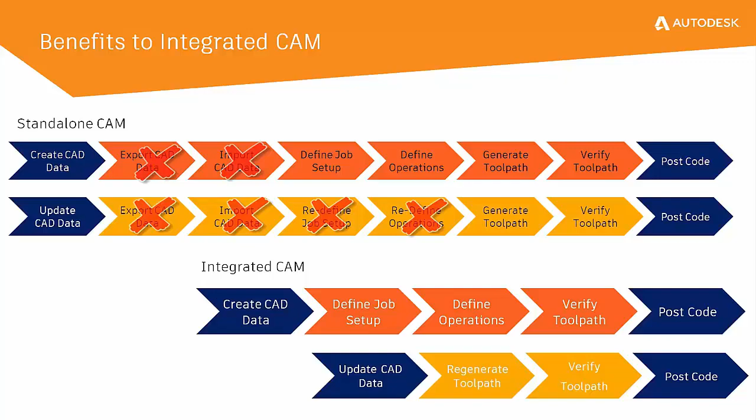So what's happened there is that, a couple of quick bullets on summary there. We've streamlined the workflow. Also, because you're not dealing with multiple softwares or file types, you end up with less files, less file types, and a simplified data structure.

Because you're working in one platform, the only extra training that you would really need is how to use the CAM tab and how to import your own machines and tool libraries. You don't have to retrain on a completely new interface or anything like that, from different developers, different icon sets, blah, blah, blah.

The natural benefit of having an all-inclusive CAD-CAM platform as well means that you have a full set of CAD manipulation functions, surface modeling, parametrics, built in, all the modeling tools that are built prior to milling. So you can fill holes in pockets, you can create or update runoffs, you can add fixtures.

Don't get me wrong, little caveat, there are products out there that do have a basic CAD modeling environment built in, but most people will agree on the call, it's far from comprehensive. Sometimes it's only surface modeling tools, it's not parametric. And again, it's a different file format. If you're a machinist, you'd have to get the design office to make tweaks to tooling fixtures and so on if they didn't know how to do it.

And the last point there brings us on to AnyCAD. Inventor includes the AnyCAD technology, which they bought into about 5 years ago. And it gives users the ability to direct edit files from other CAD programs. And this is important. You don't necessarily have to import or convert the data in.

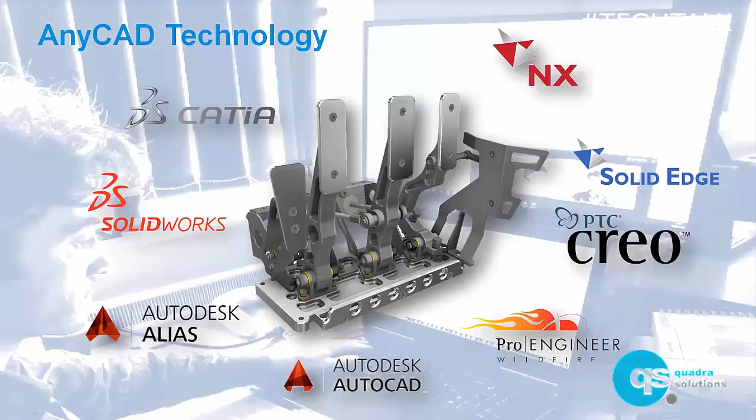Steve Hall can show you that drop-down list when he goes file open, of all those that it can take in. Some of the mainstream CAD packages will allow you to import files from other developers. The benefit of AnyCAD, though, is not that it can import the file, okay? It's that you can simply link to it and maintain an association with the other guy's part file.

So if you've got a Creo colleague in a different office or a supplier that uses Solid Edge, for example, and that guy changes their Solid Edge file, you can save over the top, hit refresh, and the associated model updates within Inventor. So you don't have to re-export and import.

Then, linking to the CAM, I appreciate I'm talking about AnyCAD here, but this is important with Inventor CAM. In the CAM tab, the toolpath and the strategy associated to that newly refreshed part that you've just re-linked from an updated Solid Edge or SolidWorks part can then be updated, as I explained earlier. Just hit refresh and it'll regenerate the toolpaths.

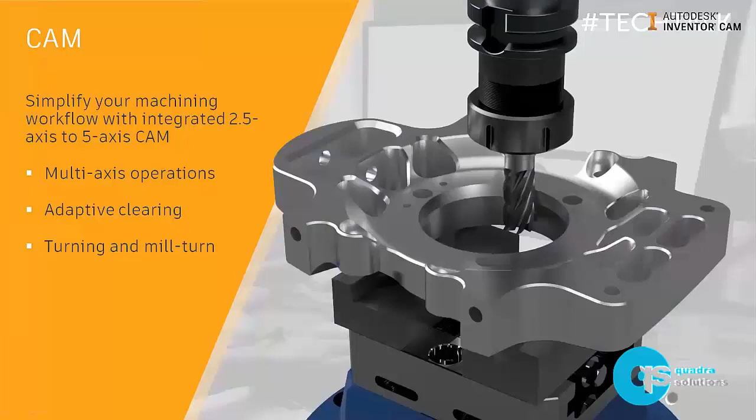Good afternoon, everyone. Right, so I'm just going to quickly go through a few bullet points about the various strategies that come with Inventor CAM, and then we'll jump straight into the software itself and have a bit of a show and tell.

So as you can see from the current slide, we can go from an integrated 2.5 axis up to 5 axis CAM, multi-axis operations, adaptive clearing. We'll be covering 2D adaptive and 3D adaptive, and we'll also take a look at turning and possibly mill turn as well. If you could jump to the next slide, please, Mike.

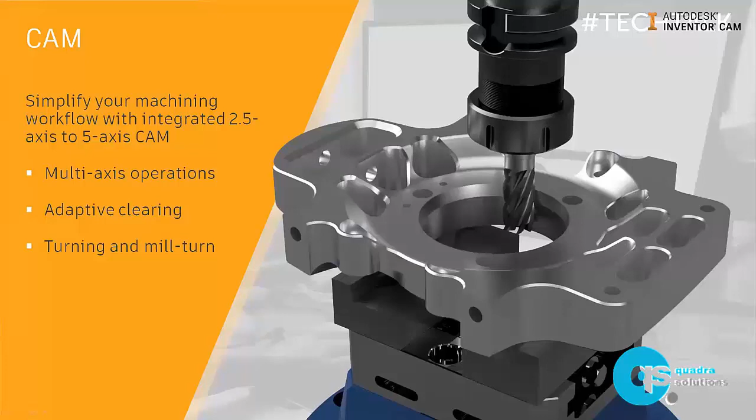Thank you. So I'm just going to briefly touch on these bullet points. As you can see from the capabilities list there, it's quite extensive. 2.5 axis, 3 axis, 3 plus 2 axis, which is where the table will cradle or rotate and then lock in situ, so it can be machined in one hit, as opposed to having to remove it from the vise or the fixture. 4th axis milling is where we would set a chuck, for example, or a 4th axis separate entity itself onto the machine.

Multi-axis milling is where we talk about simultaneous 5-axis machining. And then we're also looking at turning. There's also capabilities for cutting, as in laser cutting, for example, and also for using a probe for setting datums on multiple parts using a probe. So as you can see, it's quite extensive.

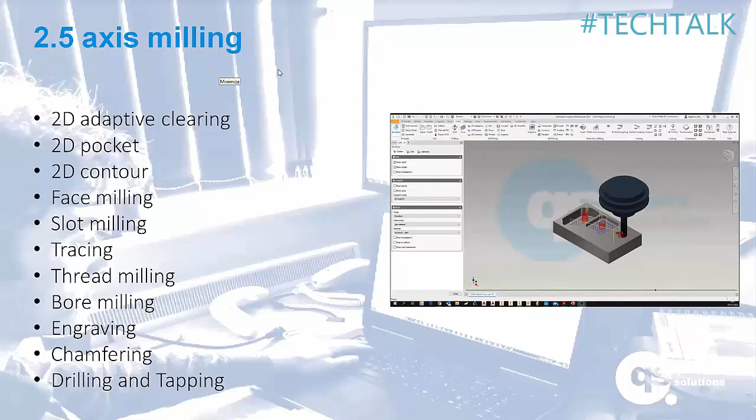Okay, so 2.5 axis milling. If you're not 100% sure what that means, essentially anything that can be machined using 2-axis moves comes under 2.5 axis milling. What we mean by that is, as you can see from the list, you've got 2D adaptive clearing, pocket, contour, and so on and so forth.

What that means is that the machine will position itself in the X and Y coordinate. It will then feed down in the Z coordinate, and it will then move in a series of X and Y coordinates to produce contours and pockets and faces, so on and so forth. This can also entail bore milling, thread milling, drilling and tapping, and so on and so forth.

It depends on the surface that you are machining, the gradients of angles and so on and so forth, upon which strategy you would choose. But yeah, that falls under 3-axis milling.

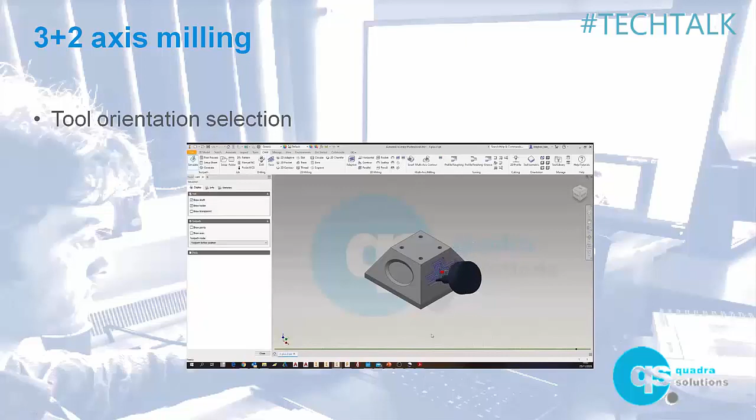3 plus 2-axis milling, short and sweet. This is where you can set your tool orientation so that if your machine has got 3 plus 2 axis milling capabilities, you can rotate and cradle your actual machine and then lock it in situ. So you can then produce pockets and holes and slots and so on and so forth on side faces, be they on an angle or at 90 degrees. I'm seeing it quite a lot now, these machines out there in industry locking themselves in position and then attacking it from all different angles.

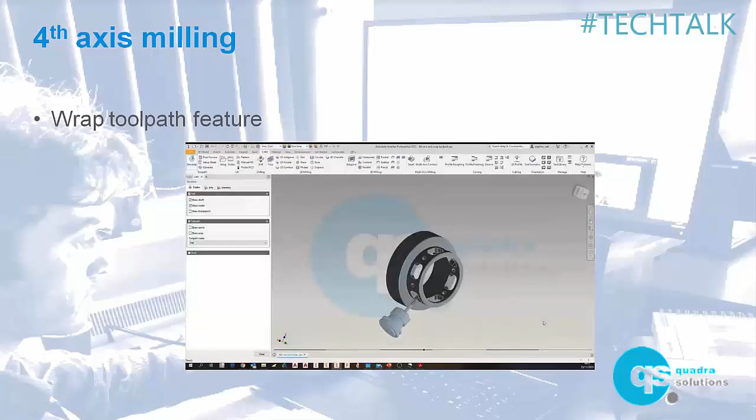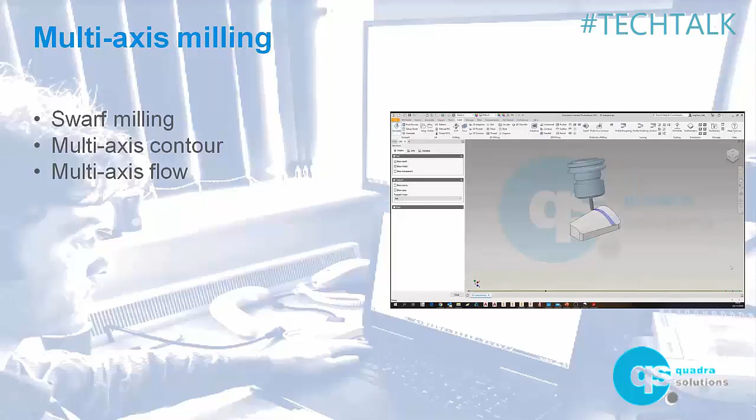Multi-axis milling. This is where we're going to be using simultaneous 5-axis strategies, such as swarf milling, multi-axis contour and flow. The video there is showing the flow control, and that is where a ball nose cutter is following the path of the contour. And as you can see, it will be cutting at the side or the edge of the cutter. It's entirely up to you. You can set whatever angle you want, and the table will cradle and rotate as it's being machined.

Turning. For those of you that are running lathes at your industry, you'll be pleased to see that turning isn't forgotten. For a while, it was quite limited. The profile roughing, as you can see there, didn't exist. You had to use a grooving tool to rough everything out, which wasn't ideal.

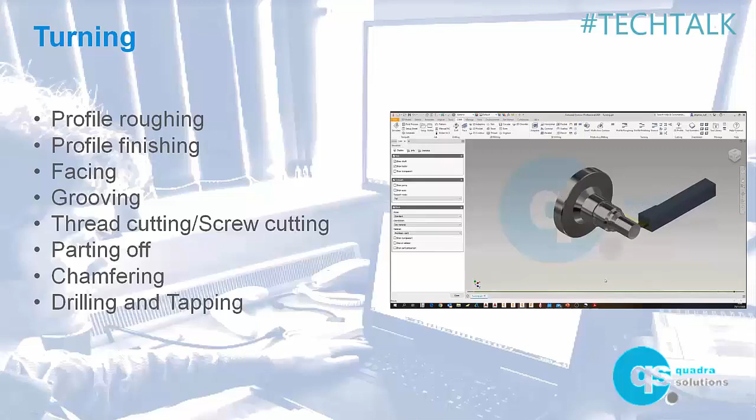But Autodesk listened to the feedback from customers, and last year they introduced profile roughing, which, as you can see, is an extremely good strategy, very efficient in that you can rough out entire components in literally just a couple of clicks. It's very impressive. So it's a good display of Autodesk actually listening to the customers there and enhancing the product when they see fit.

Okay, so what we've got here is a component, relatively simple. If you look at it in that view, you can see it's kind of like what we call a dog bone type shape. Got a couple of bores in, and it's got some chamfer details on there. If I just quickly drop over into the 3D model and the model environment that you're all no doubt familiar with, you can see that there's an extra tab just about halfway across there for CAM.

If I open up the CAM tab, and if I go into my browser and activate that CAM browser there, you'll see that I've got now the option to create my setups and my toolpaths and so on and so forth. The beauty of this is that the panels, the way they are laid out, are very similar to what you're already used to.

So if you're an existing Inventor user, when you're working in 3D model, for example, you can see that the panels, the drop down, so on and so forth, are very similar when we actually activate the CAM tab. So it's familiarity, it's not a whole new screen that you've got to memorize and visualize and learn. It's pretty much as it is with the 3D modeling side of things.

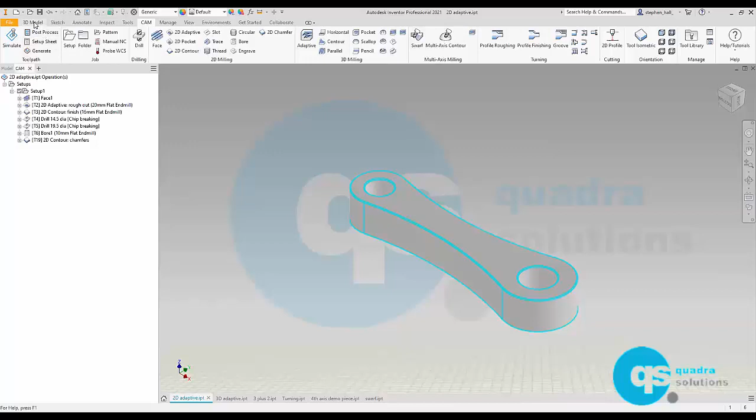Obviously, there's a few strategies and features and buttons that you need to learn how to use. But again, if you're already an existing Inventor user, you'll find this very easy to cross over and transfer into. Okay. First and foremost, I'm just going to quickly show you the tool library settings. So what I've done is I've preset everything, working my way along. I'm going to explain about each different strategy.

It's kind of like a Blue Peter. Here's one I prepared earlier.

But if I open up the tool library, this is quite an important aspect of Inventor CAM. You'll see that for this particular program, I've got numerous tools that have already been preset. What we've got down here are lots and lots of sample libraries. So for example, different types of holders, different types of cutters depending upon the material that you're machining, different types of cutters with respect to the shape and sizes and so on and so forth.

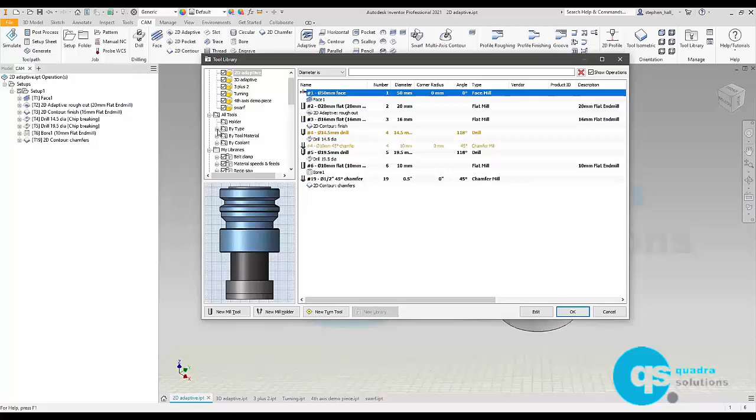For example, if I expand this little column here for different tools of type, you'll see that we've got flat mills, ball mills, tapered, face mills, slot drills. Okay, these are all generic. If I specify a drill, I can then, up in the top, go through a search process and say I want to find a 10mm drill. It will find me a bank of 10mm drills.

If I select one of those, I can right-click. I could actually edit that tool. So if that's not exactly what I've got in my workshop, if I've got one that's shorter or longer, if I open up the edit panel, you'll see now that we've got a few options. We can change the lengths of the shoulders and the flute lengths, the body lengths, so on and so forth. We can change the units from millimeters to inches if that's what we'd like to do.

In the general tab, we've got the tool number, any length offsets. We can have a break control. So if your milling machine has a presetter in there which inspects the tool before and after any tool changes, you can activate that. If you don't have a tool changer, you can activate a manual tool change. Coolant strategies, just about every single option you've got there, flood, mist, so on and so forth. So there's a lot to choose from.

You can even choose the material of the cutter, high-speed steel, carbide, so on and so forth. You can specify what holder it's held in. You can create new holder geometry if you've got your own bespoke one. And most importantly, feeds and speeds. You can set the feeds and speeds.

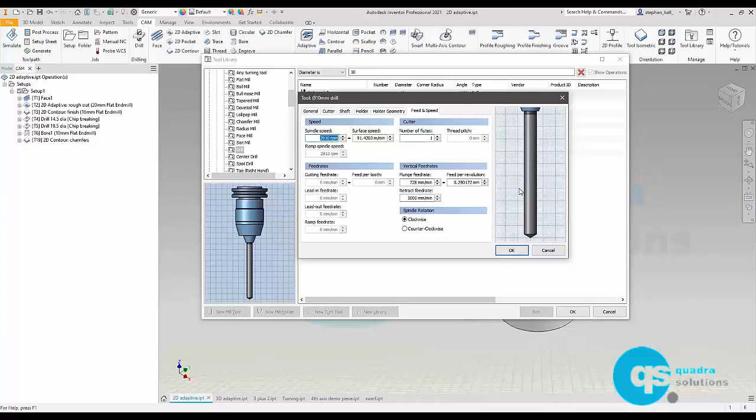If you've got a certain drill and you've got a recommended speed and feed that comes from the manufacturer, or if the guys on the machines tell you that it runs better at such a speed and feed, you can override these yourselves. You can then create your own custom library in that respect. Okay, just going to cancel that for now.

So first and foremost, we've got the component. First of all, we need to tell the software what setup we're going to use. And by setup, what I mean is I'm going to go up to this panel and select this icon here. So if I just double click there, the one I've done earlier, as you can see, it will immediately put some form of block around the component, what it second guesses the stock is going to be.

Okay. This tab is the first tab that always comes along, be it in turning, be it in milling, be it in cutting, so on and so forth. Okay. You can nominate the machine. You can nominate the operation type.

So for example, milling. You can set the orientation. Okay. By orientation, what I mean by that is I could select the Z-axis and the X-axis. So if that had been drawn by a designer who decided that actually he was going to draw it with Y pointing upwards, because there's no guarantee that the guy who designed the part would automatically have Z sitting as you would like it in the machine.

You can just select the Z-axis and planes like so. So if I select Z-axis there, I can then set what I want to be the Z-axis. Okay, I can click on the top face. I could click on a line on the component. It doesn't really matter. That is now set. The same goes for X-axis.

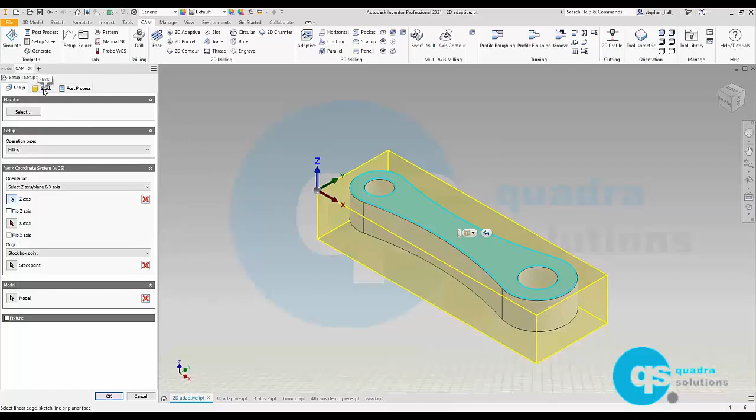The next tab along is our stock tab. And again, you've got a few options. It will give us a second guess as to what it thinks is beneficial, but we've got a little drop down there. You can have a fixed size box. You can have a relative size box. By relative size box, we mean that maybe we want to add a millimeter all around, but there's no guarantee that the material we'll get off the shelf would fit that. So we use fixed size box, and we just put some coordinates in there, which best suits the material that we've got on the shelf.

If I do a side view, you can see that we've got material there on the bottom, and what we've got there is the height of the stock itself is 30 millimeters, and what we've said is position the model offset from the top. It will default to center like so. And you see you've got an equal amount of material at the top and the bottom.

Okay, we need as much material as we can at the bottom because we're going to grip that in a vise. So if I set it model position wise offset from the top, and then an offset of 1 millimeter is fine. You can see that I've got a millimeter of material to be machined off the top. I've got a nice healthy lump there to get a hold of using my vise.

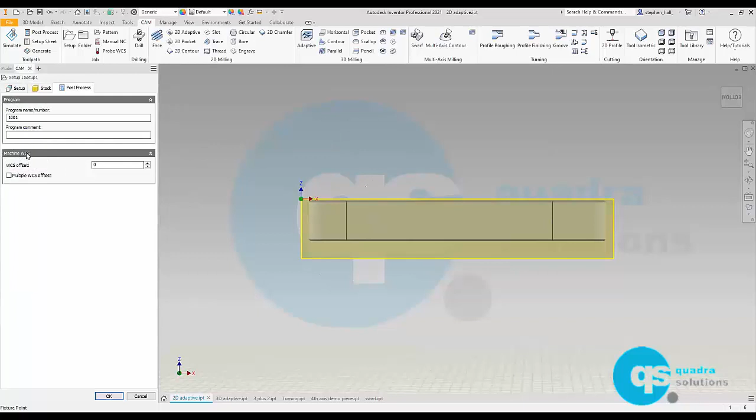The next tab is the post-process tab. Essentially, you're just giving it a program name or a number. You can put some comments in there for the start of the program. And then you've also got machine WCS, which is your machine workpiece coordinate system. If you use FANUC, for example, then you'll understand that G54 is the datum of your machine. Okay, that's X, Y, and Z positions. Setting to 0 or 1 will automatically use G54.

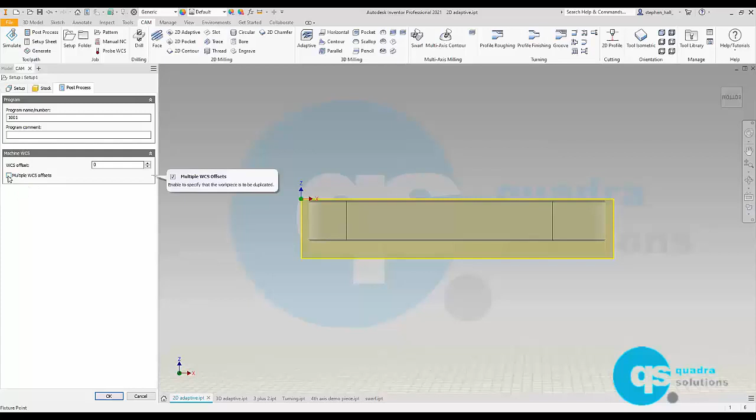If you have multiple components on your machine table, so let's say you've got 3 components on there, then all you do is you tick the multiple offsets box, and you can give it some number of instances. So for example, we've got 3 there. We've now got 3 components. We'll increase each increment by 1, so it'd be G54, G55, G56, and so on. And then what you could do is you could then output the program to suit 3 components as opposed to 1.

Okay. Operation order, you can preserve the order so it will machine one of them before jumping to the next, or you can have it ordered by tool, for example, whereas you could use a face mill to do all 3 components before tool changing for the next tool. Okay, so I'm just going to deselect and cancel that because I've already got one set up.

Right, let's go back to the home tab. Okay, first option there, as you can see, we've got a face operation. That falls under this category, 2D milling. We've got 2D milling, we've got 3D milling. 2D milling is contour driven, 3D milling is surface driven. As you can see by this, 2D milling is perfect for this component because we've got a lot of contours with no surfaces, with no fancy shapes that we need to produce on there. So if I go up to this icon face, this would open up this panel.

And first and foremost, it's selected the 50mm face. I just click tool. I can do a search through my existing library, or I can preset a series of tools within this component. Select 50mm face, and that's it.

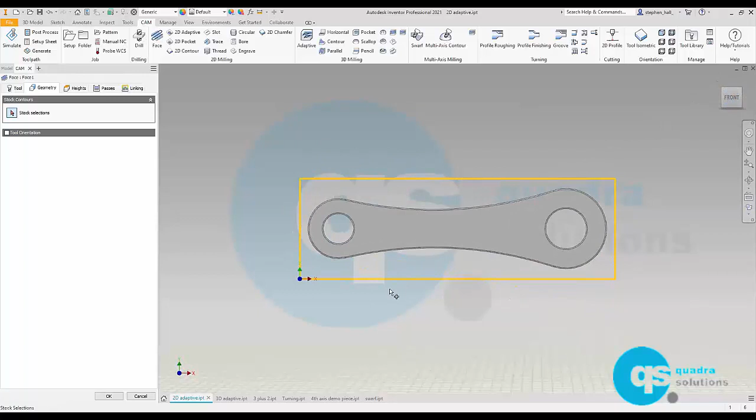So I've picked a tool. The tool is defaulted to flood for that tool, which I'm happy with. The default speeds and feeds I'm happy with. So I'm going to move to the next tab, which is geometry. It will look at my stock. So I want to face mill all the way along the top of this component. So looking down from above, you can see that the stock is encompassed by that yellow line. So I don't need to make any changes to that.

If I move to the heights tab, you'll see that if I look on the side view, you've got color coordinated heights. You've got clearance height, retract, feed, top and bottom. Okay. Again, every feature that you use has got those colors, color coordination there. And then I'm going to leave that exactly as is. I'm going to make no changes to that. For passes, I'm going to make no changes again. And the same goes for linking. I'm just going to click OK. So all I've done basically is select one tool.

Okay, you can see now the toolpath has been highlighted on the component. You can see there the red arrow. If you see the yellow line, that's rapid. If you see green, that's what's called linking. So it's a lead in, it's linking in. Blue is where it's feeding across. As you can see, it feeds across. It then leads around there and comes off and up.

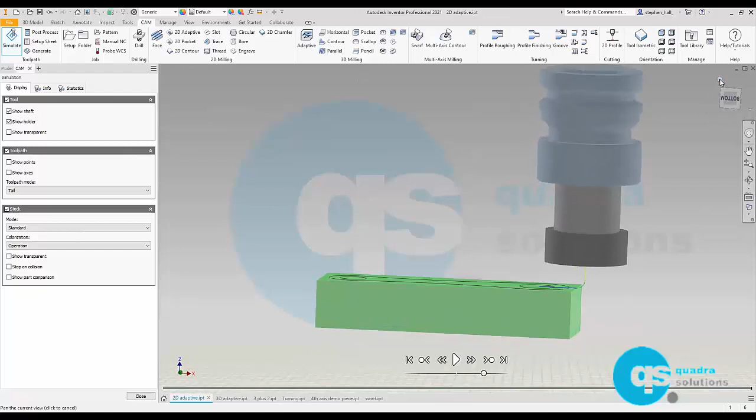If I give a quick demonstration running simulate, and I'll discuss the simulation environment later. As you can see, if I press play, it's pretty much done what I wanted it to do. Now, if I look at that from a side view, you can see that all of the cutter hasn't come off there.

Okay. Now, the reason being is that the software expects the machine that you're using to be perfectly brand new and not have been on the shop floor for the past 25 years and had numerous bumps and bangs, and your tooling and whatever to be perfect. That's not always the case. If need be, and you need to sort it so that it comes off the table.

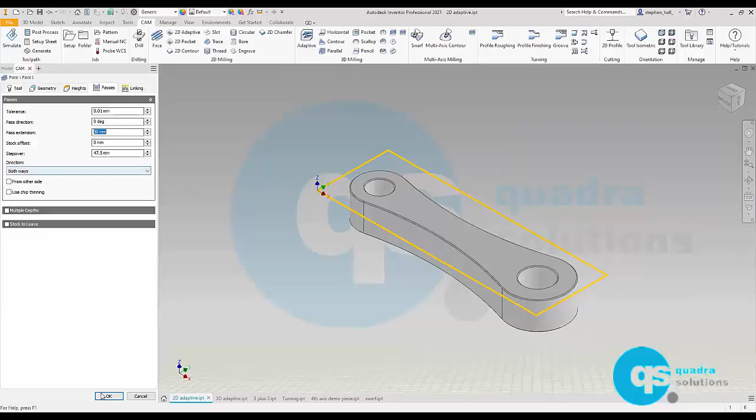If I just right click and edit to go back into that feature, if I open up the passes tab there, you can see we've got an option for pass extension. If I just put a figure in there such as 30 millimeters and press enter, if I now give an example, can you see now it comes all the way off in both respects. Okay, so it doesn't produce anything called a back cut. So you probably get a better surface finish on your older types of machines.

And that's it, face milling, very minimal. About one change made, but everything else straight out of the box. We're now going to move on to 2D adaptive. And again, this falls under the 2D milling environment.

And if I quickly give a demo of that, what we've done this time is geometry. We've selected those outer edges. And all I've done is I've clicked on those edges for pocket selections. So I've told it that that geometry is what I want to rough out. 2D adaptive will do the rest for me.

Heights, I've not changed anything apart from made sure that the model bottom has been selected there and the stock top. Passes, I'm going to leave it exactly as it is out the box. And you can see you've got an optimal load on your machine and your cutter there of 8 millimeters. And we've got some stock to leave. I've changed it so the radial stock to leave will leave 0.5 millimeters around all these faces. And then axial stock to leave, I don't want to leave any on the bottom.

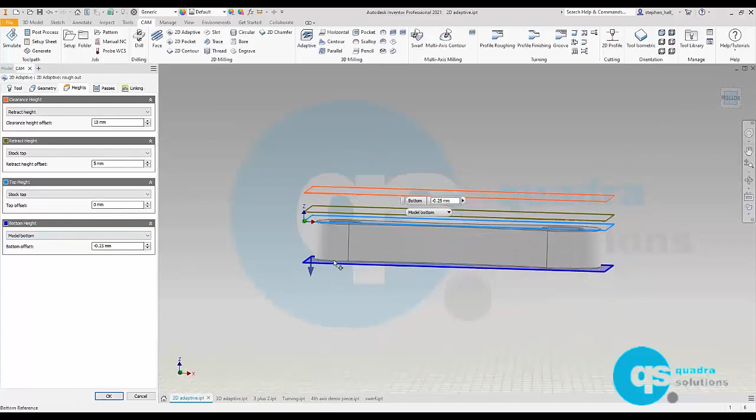And you'll see also in the heights that at the model bottom, I've just told it to go 1/4 millimeter down. So if I just quickly zoom in on that there, you can see it's just slightly lower there so that we just cut a little bit deeper than we'd like. If I just click OK for this one, and again, I will give a quick simulation of that.

The beauty of the 2D adaptive is that it will try and maintain the same amount of cutter load on the machine at all times. There won't be any abrupt or nasty changes where it will dig into the component and the cutter will start screaming and vibrating. It'll do its utmost every time to maintain that same load on the cutter. There's no nasty surprises. Okay.

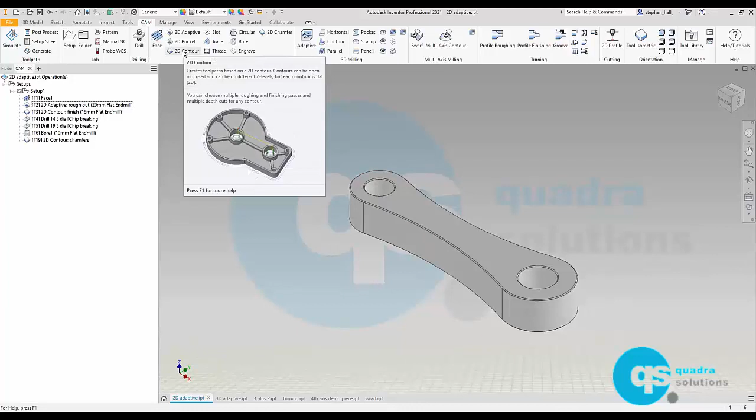2D adaptive roughing strategy. What we want to do now is we want to create a finishing strategy that machines around this profile. Okay. And we're going to use something called 2D contour. But rather than start the contouring operation from scratch, if I go into 2D adaptive and I right click on there, about halfway down I've got an option there, create a derived operation. If I say I want to use 2D contour derived from that 2D adaptive operation, it will then create a 2D contour operation and the same tool will be selected.

If you wish to change the tool, then you can just go back into tool and change it as such. But the geometry has already been selected because it's derived from the roughing operation. We've already got that selected. The heights are all the same. We can make some changes if need be, so on and so forth. So we've got very minimal changes. And as you can see there from that one, actually machining around the component as a finishing pass.

Okay, drilling operation, very simplistic. We've got 2 holes there. We're not sure what size they are. Let's quickly go up to the inspect environment. Let's just measure that one. You can see we've got a 15mm hole there, and we've got a 20mm hole there. Nice and straightforward. We just go drill operation in the drilling environment, and slightly different, not as many tabs for this one. We pick the drill that we wish to use.

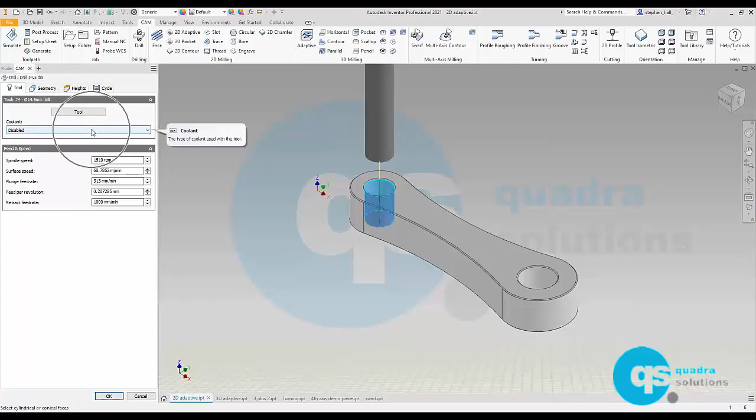We decide what type of coolant we want. We've got it disabled for this one. Geometry, this is a good feature. You select the hole. If you have multiple holes that are the same diameter, you don't have to go through the arduous process of selecting each individual hole the same size. You've got a little button there for select same diameter. Okay? Heights. It will err on the side of caution.

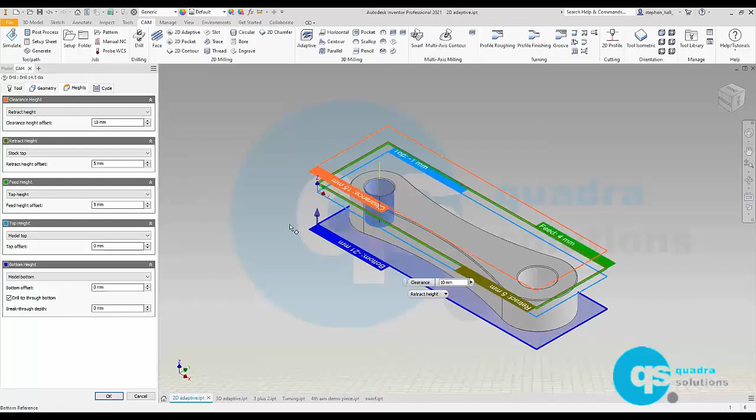And if I spin it around and look at it from there, you'll see that the hole feature is there. The drill will not bottom out unless you tell it to. You may want that to be a blind hole. If that isn't the case, you just select that button there to put the drill tip through the bottom. And as you can see now, we've gone through the bottom of the component.

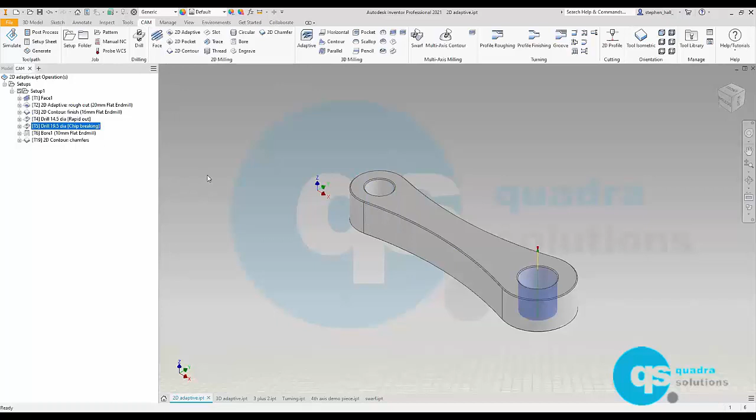And then lastly, drill cycle. What type of cycle do we want? Lots to choose from there. Do we want chip breaking? Do we want deep drilling? Do we just want to go through in one hit? If we do, we just click OK. And you can see there, the drill operation. We've got the other process there exactly the same. We could right click on that one and we could duplicate and then just change by selecting the new hole as opposed to the old one.

Nearly at the end now, we've got a boring operation. This is a good feature. This will use something like a slot drill or an end mill. And if I just demonstrate for those of you that aren't aware what a boring operation is, if I just turn the stock off, what a boring operation will do is it will feed itself down into a hole and then spiral around in increments of 1mm, which this one is defaulted at, just to bore out the hole to give us a superior finish and better size.

And again, it's using both the holes. As you can see, that is just one operation for both holes. All we did for that one is in geometry, we just selected both of the hole features. What Inventor will do, it will recognize they are both different sizes and it will adjust itself accordingly to create each hole there.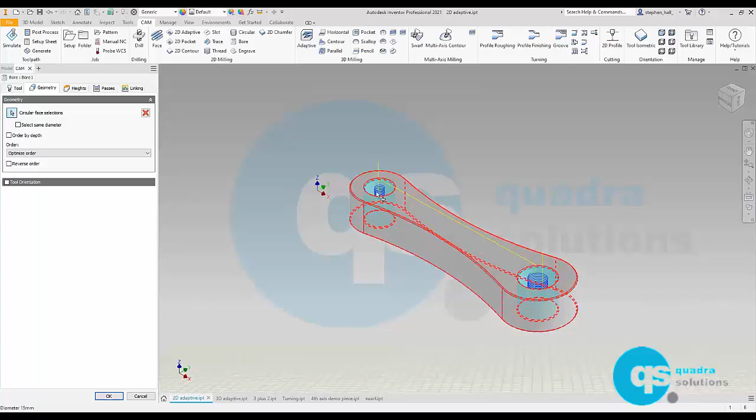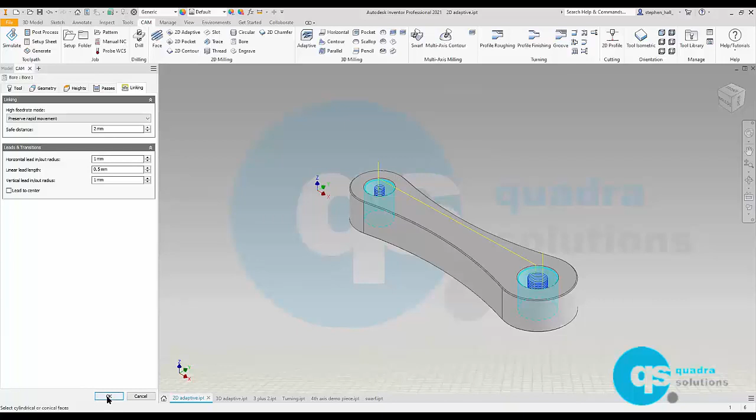Passes is where you change the pitch. 1mm increments is what it defaults at. You can change that to as fine or as rough as you wish. If it's a finishing operation, you probably want to reduce that, but obviously it's a little bit more time consuming. The linking tab, lead in, lead out, you can make some changes. Again, I find that working straight out the box and just clicking OK gives you the best option. If you're not happy with it, you can then go back and tweak it yourself.

Now finally, 2D contour. We've got there some chamfers. If I double click 2D contour, but this time for geometry, as you can see when I zoom in, I've selected the bottom of the chamfers there. As soon as I do that, if I go into my tool and I select a chamfer tool, the strategy will recognize that I'm creating a chamfer based on the fact of my tool selection.

So that when I go into passes, you can see now a new box would appear. This isn't normally in our 2D contour, but as soon as you select a 45-degree cutter or a chamfer tool, it recognizes and it will adjust itself accordingly so that you can make some changes. Maybe you want a tip offset so it just drops down a little bit further, and we'll put around there like so.

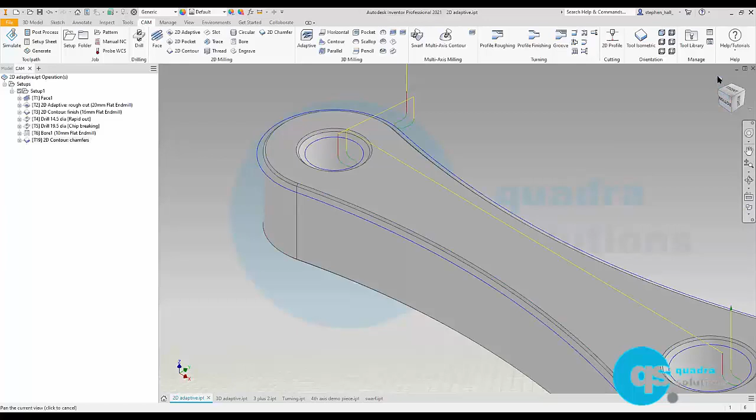Okay, so I do appreciate that I've rattled through that one, but we have got quite a bit to cover. So we've gone from a basic setup, the face milling operation, 2D adaptive, 2D contour, 2 drilling operations, a boring operation, and a 2D contour. So now let's open up the simulation environment. Let's have a quick look at that.

Okay, let's just rewind back to the beginning. So what you've got is just like a standard video player. You've got a play bar, you've got fast forward. You can jump forward through each feature strategy. And you can rewind back to the beginning. Okay. You've got an option there to show your tool. If you don't want the tool on display, you can turn it off. Same goes for shafts and holders.

Toolpath, you can have it show the entire toolpath or just a tail. I prefer tail because you'll end up with spaghetti all over your component. You'll see the toolpaths here, there and everywhere. What the tail will do is it will follow the cutter for a short while and then it will remove itself. And then finally, you've got the option for stock.

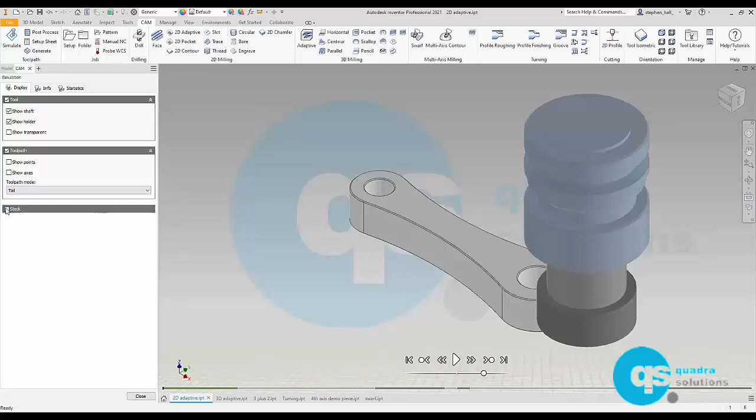Okay, the coloration, I prefer to use operation because it will differentiate between each operation. It will change the color. If you use material, then it will stay and maintain the same color. So you can't really see much of what's going on. So I prefer personally to use operation. If I press play now, you'll see it in its entirety. The model still exists underneath the stock. If you want to turn the model off, you can do.

But as you can see now, we've got a roughing strategy there for the 2D adaptive. Once that's finished, it will then jump straight to the 2D contour operation, where we have a finishing cutter there. We're now drilling the holes, boring out, and then we're going to chamfer.

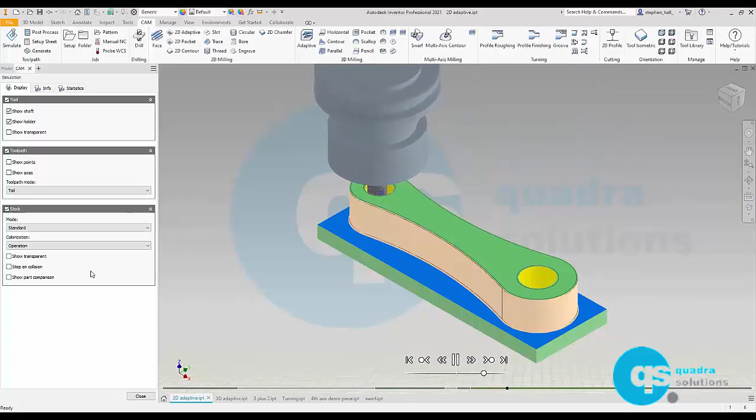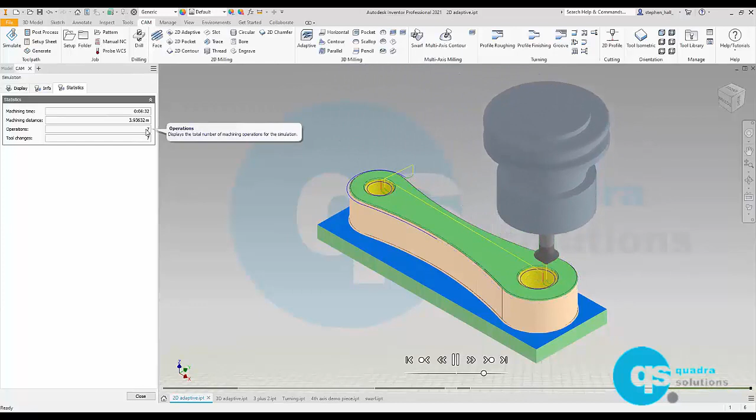You'll also see on this panel, you've got an information tab, giving you all the positions, be they X, Y, and Z, spindle speed, and so on. It'll also give you a time for each operation. And then you've also got a statistics panel there, giving you the total machining time, number of tool changes, and so on. As you can see now, we've chamfered out there. Happy days. Okay, so we've looked at that, we've verified it, we're happy.

Okay, what we can now do is we can post-process. I can right click on there and select post-process, or I can go to the post-process panel up there. Either way, once we post-process, this panel appears. Now, Inventor has got a lot of different post-processors, as you can see from this extensive list. Okay, I've defaulted to Siemens Sinumerik, 840D. Okay, and you've got an output folder. Be that a folder on your machine, or maybe a USB drive, or maybe something on your network.

You can give it your program name or number. You can put a comment in there if you wish to do so. You've also got a few modifications you can make to the post. These are editable modifications or properties that you can define for your post.

So for example, some machines don't like the preload tool operation, whereas it will call up a tool, for example, tool 1, and then the next line will say T2, where it gets the magazine ready. Some machines don't like that. If yours doesn't like that, quickly tick that box there, click no, and then we're good to go. Everything else, we're going to leave it as is.

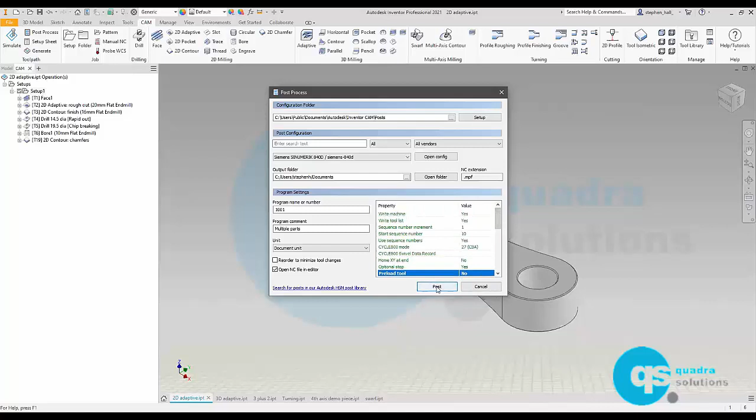I'm just going to click post, save it there. It's going to tell me I've got one there because I've always used the same program number. And as you can see now, we have the full program there. As you can see, it's got the program number. It's an MPF file because that's the Sinumerik one. Tools 1 to 6 and then 19 with the tapered. You can redefine your tool names if you need to do so.

And as you can see, each individual operation is now highlighted there. T1, D1, M6 to change tool, spindle start M3, and as we said before about the workpiece coordinate, there's your G54. That's setting your datum. And then we've got all the X and Y coordinates.

What I do like about this is every rapid move is highlighted red, so you can quickly scan through everything. And if there's anything in there that you don't like and it's in red, you know that you can change it. Anything in green is where it feeds down, and then blue is where it will reduce contours. That's basically it. Straightforward and simple.

I'm going to quickly show you 3D adaptive now. So what we talked about here with 2D adaptive, we did the 2D adaptive roughing strategy. You can now move over to something called 3D adaptive. The difference between the two is 2D adaptive is contour driven, whereas 3D adaptive is surface driven.

So if I expand and open up this part, if I rotate that, you can see we've got a component there where the form is out of the ordinary. It's not a standard 2.5 axis part. Using a 3-axis machine, that can easily be achieved. If I open up the 3D adaptive control panel, you'll see now those tabs are identical to the 2D adaptive one, the geometry one, and so on and so forth. Like I said earlier, it always stays the same.

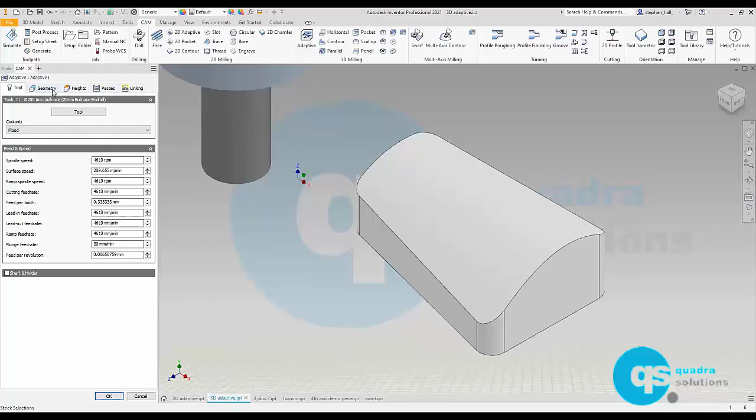We've got a cutter there we selected. Geometry, we're just going to use stock geometry again, so basically everything inside there is fair game. We'll machine it away. Heights, exactly the same as earlier. If I look at it from the side view, we've got some clearance heights, we've got the bottom height, the top height, so on and so forth.

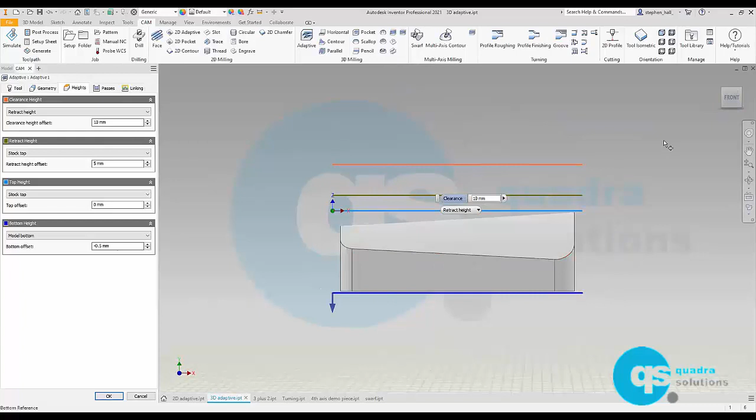And then for passes, we're going to leave everything as is. We can set a maximum roughing step down. If we want it to go deeper, we can do. Stock to leave again, but everything else we're just going to leave. I'm going to click OK. And then if I quickly let this generate, you can see the toolpath there is a bit more extensive.

If I just right click and simulate this toolpath, you can see that it will do its utmost to maintain the same amount of load on the cutter as much as it can at all times. Again, no aggressive moves, no sharp moves into corners and full diameter cuts where the machine starts screaming. And I'll just speed that up a little bit, I'm conscious of time.

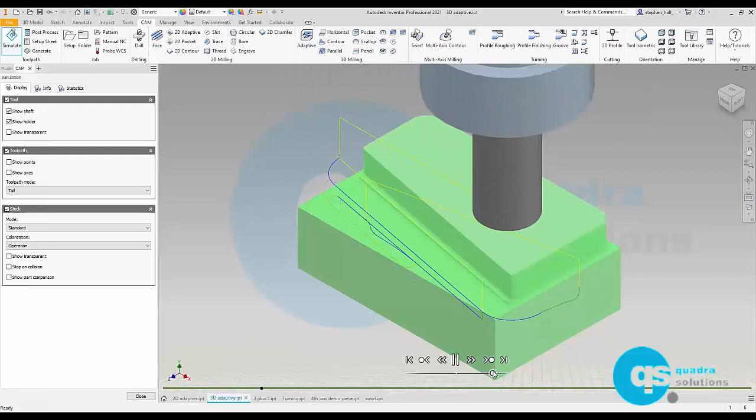You can see that it's gone to the bottom, it's roughed out its initial step, and now it's working its way back up, taking smaller cuts to produce said form. So again, very minimal clicks, complex part roughed out in no time whatsoever. Very, very simple. If I close that one, we're going to have a look at some 3D strategies now.

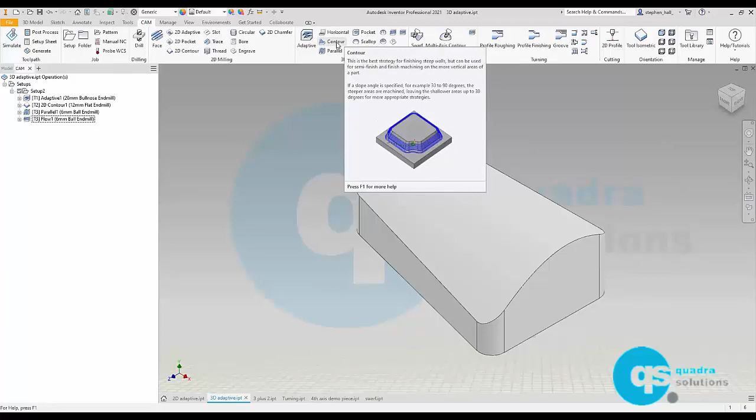I've got another operation there where I've used 2D contour, where I've just cleaned up the edges, just like the last program where I machined around. What we're going to look at now is the parallel and flow. 3D milling has a lot of strategies depending upon the gradient. So for example, you've got 3D contour. What I really do like are these little tool tips. If you hover over one for long enough, it will tell you what each individual strategy does. So for example, contour is for steep walls.

Okay, and parallel is probably one of the oldest. It's been around for years, but it's very, very useful. If I quickly give you an explanation, what we're going to use is a ball nose cutter, so something with a decent radius on. Okay. The geometry, same again. We're just going to keep it as the silhouette, so we're not going to make any changes.

Tool center on boundary, which means that it can pass over the edges. If you have it within the boundary, then you'd have some little scallop marks there. But again, it defaults to tool center on boundary anyway. Heights, we're going to leave as is. Passes, the only thing we change is the stepover. I think it defaults to something like 10%. So I've just reduced the stepover to 0.5 millimeter for this one. And then I'm just going to click OK.

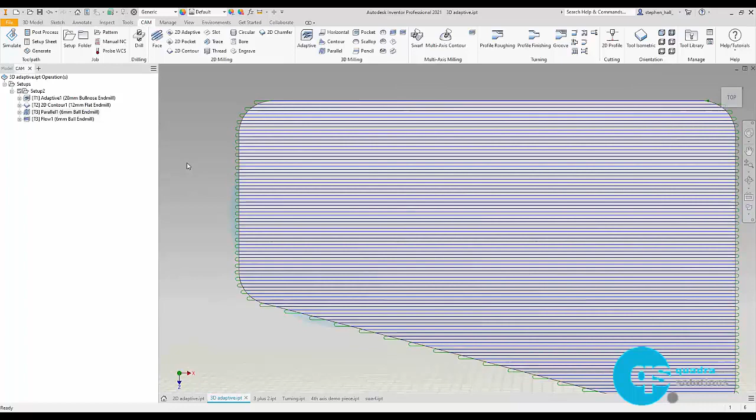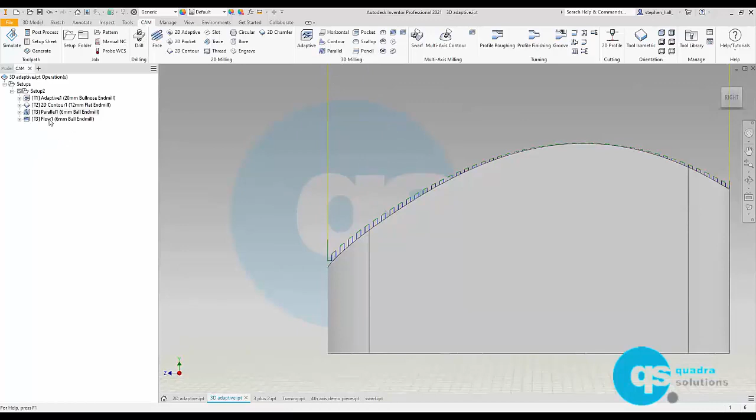And as you can see, looking from above, you can see why it's called parallel. Got lots and lots of nice, neat parallel lines there. If I go back to home and show you from this view, what you'll also see is, the more aggressive the drop, the 0.5 mil increments will stay the same. Therefore, we could end up with some scallops. That's why sometimes it's best to blend two strategies together, or use the relatively new one called flow. But for now, let's just leave that one as is.

If I quickly simulate that one, I'll turn the stock off and you can see what's going on. There you go. If I go from that view there, you can see that we're moving in X, Y, and Z to create that form on top of there. So again, a minimal amount of button clicks gives us a very good form on top of there.

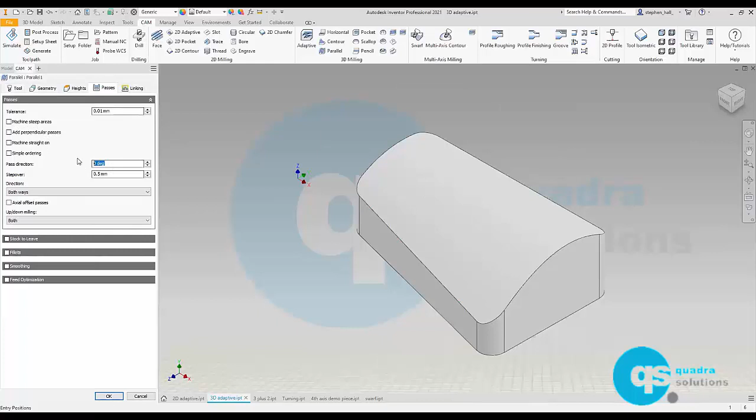What you can also do is, if you're not happy with the direction it's going in, maybe for your surface finish you want it to be a different gradient, for example. If I go on to edit, go on to passes, I can change the pass direction. So I could go on 90 degrees, for example. And then OK, and that will generate a toolpath, which you can see now goes off in a different direction.

Now, one of the new kids on the block is called flow. Again, that falls under 3D milling. It's a 3D milling and also a multi-axis milling strategy. And flow is essentially very similar to parallel. For the geometry, you just click the face and you choose a direction, be it in X or in Y. Passes, you don't nominate sizes, you actually give it a number of stepovers.

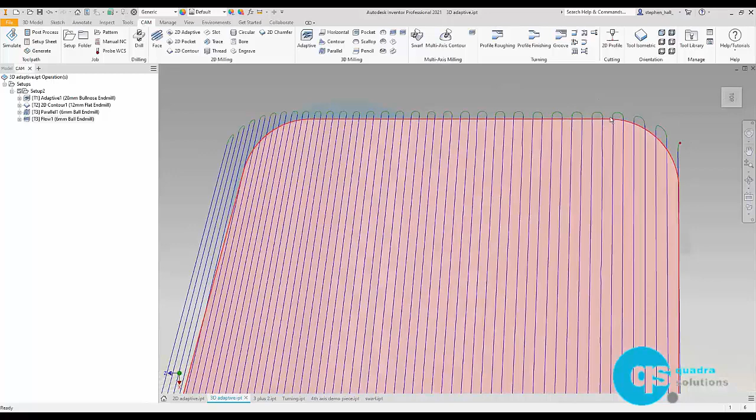And by doing that, if I look at it from above, can you see at the top we've got some relatively short gaps, and some slightly bigger ones. If you look at the actual cutter path, we've got straight parallel lines down there, but along here it fans out, so it follows the contours of the component. So that might be preferable depending upon your surface finish. Again, you could go to the nth degree, put 100 in there, and get a very good finish on top of that component.

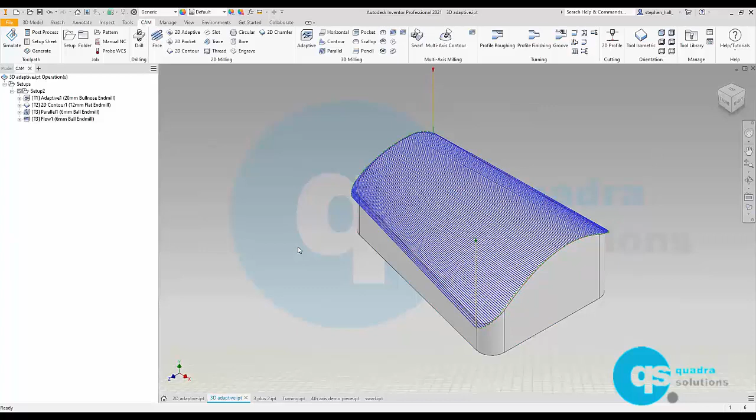Again, very simplistic. I'm just going to change this one back so that you're not sat around watching it all day. What I'm going to do is change to multi-axis. So rather than a 3-axis machine, let's assume that we jumped onto a 5-axis machine. We can activate multi-axis, and let's say we want to put a tilt on there, because they always say you should never machine right on the bottom of a ball nose cutter. You should try and machine on the edges to get a better finish.

So if I put a 15 degree sideways tilt in there, and then, let's see what happens with that one, and simulate it. If I look at it from the edge now, you can see it's using the full simultaneous 5-axis capabilities of the machine, like so.

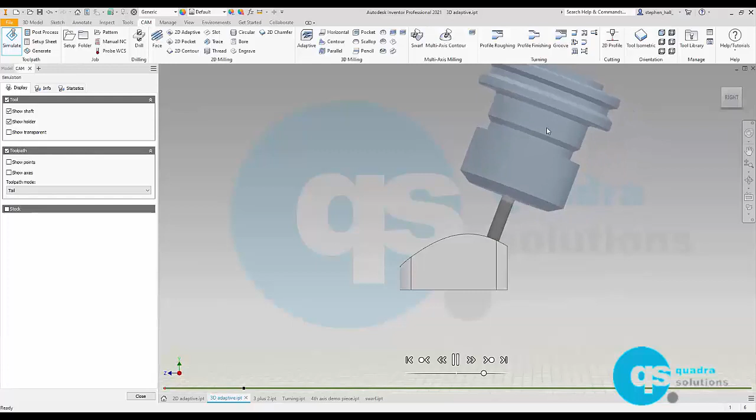Okay. So again, if you see some 5-axis machines producing components like this, you instantly assume that it's quite technical and there's a lot of work goes on in the background. There isn't. It's quite simple as that. Inventor CAM will do all the hard work for you. You just nominate the face, the number of step overs, give it some limitations, then it's not trying to spin itself around here, there and everywhere.

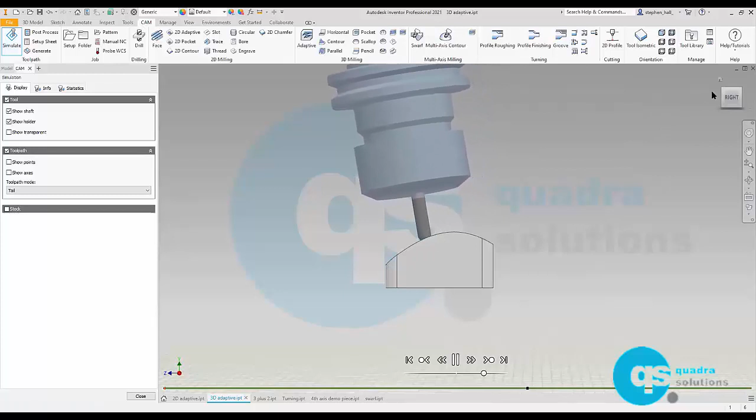So like I said, just put a 15 degree sideways tilt, and as you can see there, it's doing all the hard work itself. And if you remember looking at the machine, that spindle will maintain vertically. It's the table that will be rotating around there. Okay. So those are your 3D adaptive strategies. Conscious of time, I've waffled on way too much, so I'm just going to go into 3+2.

If you have a 5-axis machine that doesn't do simultaneous machining, but you want to tilt your component over without removing it from the vise, if your table has got a cradle or any axis of rotation in there, very, very simplistic. If I go into the setup part, what I've done is I've created a datum in the center there. What I've done for the model is I've just used from solid as opposed to a generic stock, just to save a bit of time so we're not having to rough everything out.

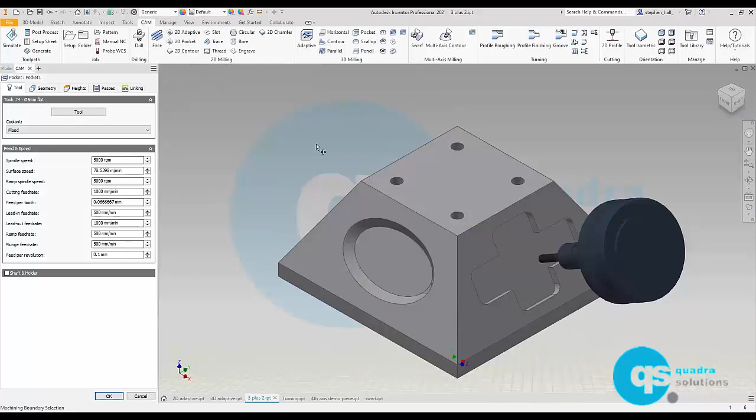And all I've done is I've gone on to a standard 2D pocket cycle. I've picked a tool, but with geometry, I've got a little option there for tool orientation. If I just deselect that one and I deselect that, we've now got a tool. We now need to tell it what orientation we're going to be working in. If I expand this tool orientation panel, first of all, I need to select a Z-axis. So I'm just going to pick that face there as a Z-axis. I'll just deselect that one.

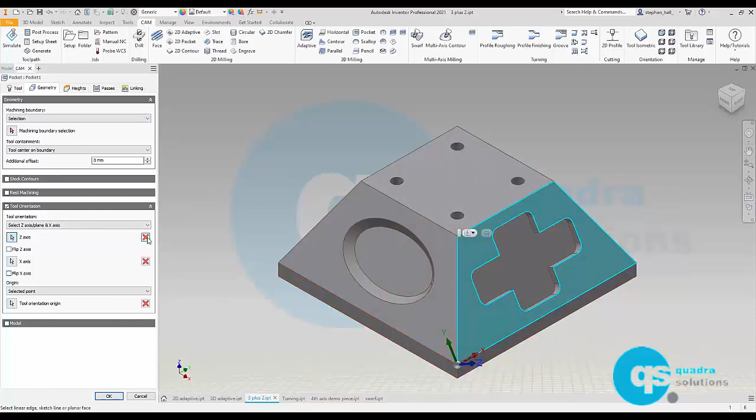That's now my Z-axis. X-axis, I can then just pick an edge, like so. And then as you can see now, if you look at my triad for my X, Y, and Z, they've now positioned themselves there. If I wanted to maintain the same datum at the center, then I could do, or I could change the point of my datum by going to selected point. Let's say I want my datum to be over there this time. It really is that simple.

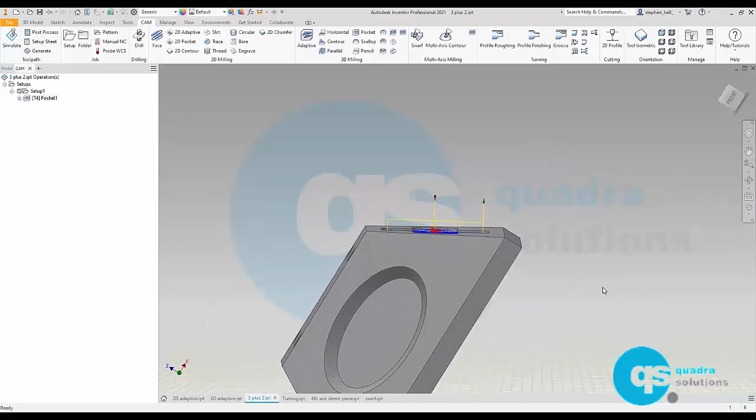Okay, and then I just pick the pocket that I want to machine. The heights, we'll keep that one as is. Bottom height, top height, so on and so forth, if I say selection this time for bottom height, and I pick that one, you can see there we've got a cutting strategy now. So in the machine, the table would have rotated itself in that orientation, so that when we come to simulate that one now, you can see that it would pocket it out like so.

So again, it might look complex when you see it on the machine. If you walk past the machine and you can see the table tilted up and you're creating a pocket like that one, it isn't. It really isn't. The CAM package will do all the hard work for you. It's just a case of knowing what it is that you need to do. And that's just simply set a tool orientation, pick yourself a cutter, select the pocket, and let the CAM package do all the work for you. Okay.

So turning, we'll have a quick look at turning. For all you turners out there. As I said earlier, this used to be quite limited. You had the turning option there. You didn't have profile roughing, profile finishing. You just had a profile operation. And all the roughing out strategies were done with the grooving tool. It was quite long-winded and not the greatest. As I said, Autodesk listened to the feedback from customers, and feedback was that they needed a roughing operation. And so last year it was introduced into Inventor, and yeah, it's much, much better.

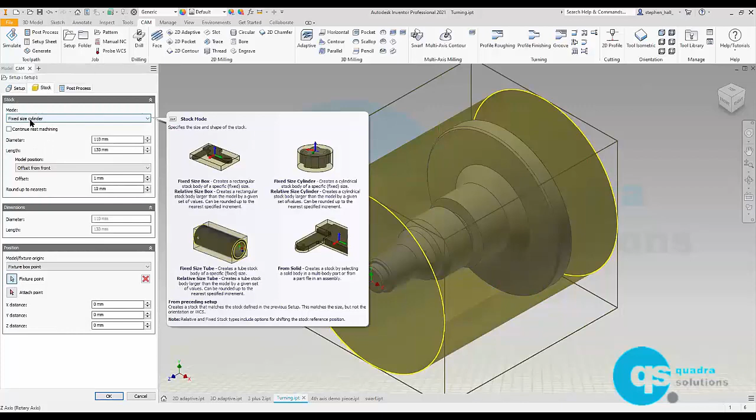The setup tab for this one, slightly different. Again, it's the same 3 tabs that you're used to, but this time we've changed the operation type from milling to mill turn. The moment you do that, when you go into stock, it will default to a fixed size cylinder. If you're happy with the initial setup, then you can just select OK and leave it as is. But what you can do is you can pick your Z-axis, and it will default to the center of the component more often than not. What I also like is you've got an option there, chuck reference, and that's that green square there. That will denote where your chuck is.

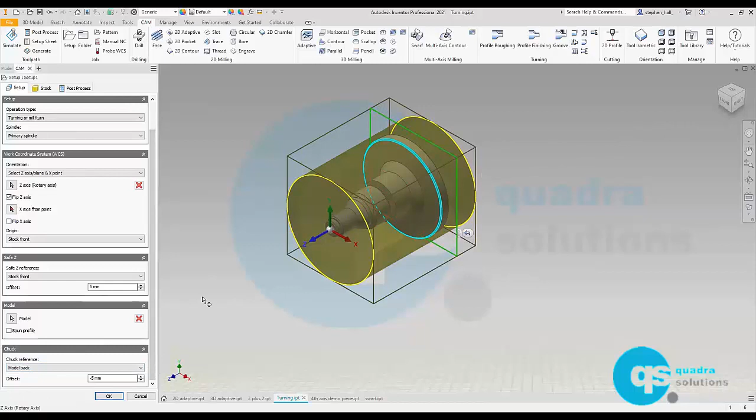You can tell it in relation to your stock where the chuck is, so that when you run a simulation, if you're going to strike into that chuck, you'll get an error message. You'll get a big red flag saying that you're going to have a bump. Okay, very important.

What I also like is this option here, spun profile. If your component has a few holes in there, or maybe a couple of flats or a hexagon feature on there, if you leave that unchecked, then Inventor will try its damnedest to machine everything that it can see on that component. So you could end up with some errors. So what they've introduced is something called spun profile. So it will eliminate any features that aren't part of the turning strategies.

Stock, we'll leave it as is, as a fixed size cylinder, and same again for post-process, but you can see, just like every other strategy, it's the same tabs. Facing operation, very simplistic. If I double click, you can see that in our tool library, we've got numerous turning tools. Okay, and again, you've got the option to create your own, or you've got the option to use what's default from the current library that they've got.

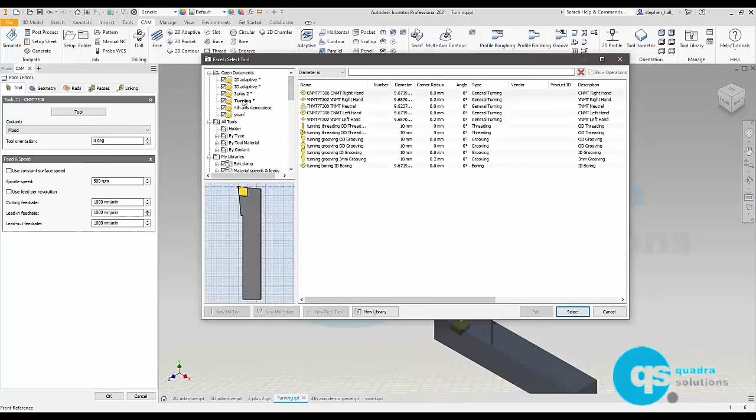If I go into sample tools there, you can see different types of turning tools, different tips. Okay, if it isn't what you've got, then you could create your own turning tool there by going into the insert tab, changing what type of insert it is, all the different shapes that are known to man. As you turners will know out there, there's a tip for just about every occasion, all the different types, the different grades. So you can create your own tool library if you have your own tooling like so.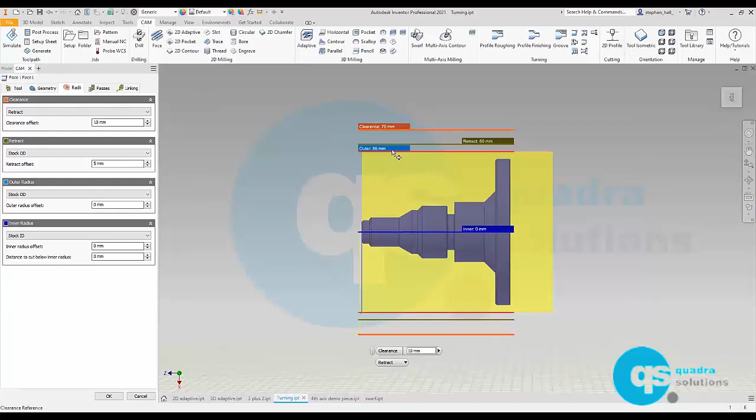Geometry, it's defaulted to the entire component. Okay, the front we've defaulted as a model front. We're going to leave everything as is with that one. The radii is the same as the heights for the milling tab. Okay, you're just giving it your clearance and your outer tab, so on and so forth. So again, we're going to leave that one as is. Passes is same again. If you want it to be roughing out with multiple passes as opposed to one, you just check the multiple passes box there, tell it that we want to step over 1 millimeter, and that's pretty much it.

I don't think there's anything. There's one thing I did want to show you. Yeah, that's okay. If I just open up the profile roughing, what I quickly want to show you for this roughing operation, we'll leave that one as is. We'll put allow grooving there. I'm just going to quickly go to that roughing op. I'm going to click OK. And by and large, that roughing cycle looks pretty impressive. Okay, it's taking 1 mil cuts. Everything looks absolutely fine. And you'd run that as is.

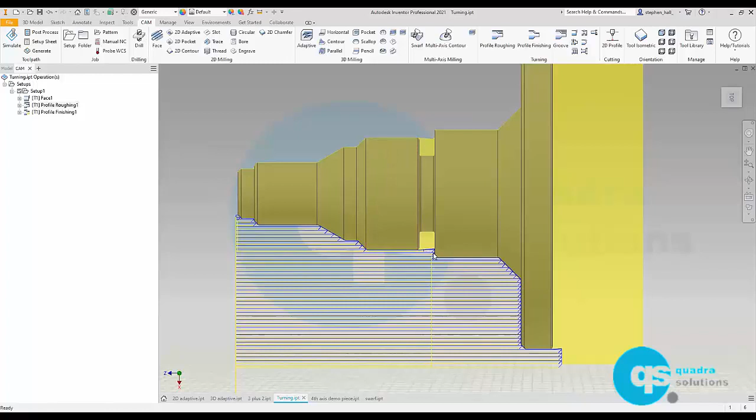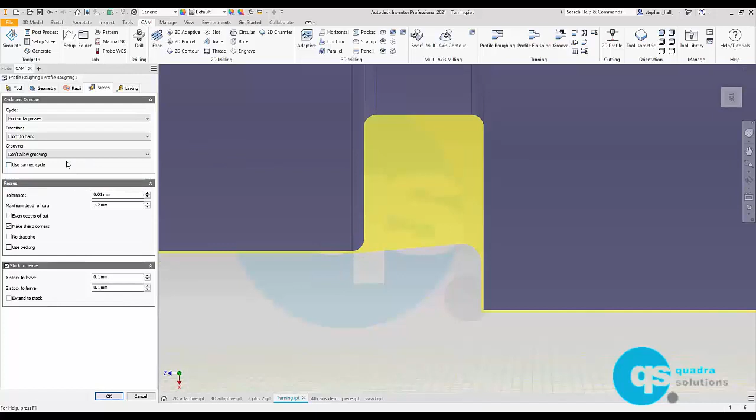However, if you zoom in on that little groove there, can you see that the software assumes that the cutter you've got can do this. It will try and dig in. It'll try and rough out as much as it can there. I'm fully aware that there are a lot of tips out there that won't be able to maintain that, or it'll just end up chipping. If that is the case, then all you need to do, you go back into edit, and then under your passes, you've got a grooving option there. Change that to don't allow any grooving. Click OK. As you can see then, nice straightforward strategy, cutting straight through there.

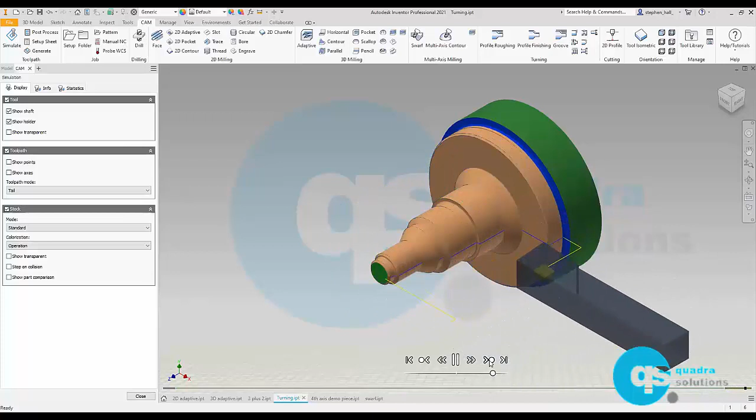Go back to home for that one, and then we'll simulate that. We'll turn the stock on. So we will face, rewind there, and then we'll see the roughing operation. Okay, I'll just speed that up again. And as you can see, if you've already run this simulation, but you want to see the finishing strategy, then all you need to do is the little fast forward button there, jump to the next operation, and it will jump to the profile finishing operation. As you can see there, got the finishing like so.

And all I did with that was go onto there, right click, same as before, create a derived operation, and say that I want to use a profile finishing. By doing that, I don't have to select anything else. Only thing I did change was the cutter, like so. Very, very straightforward. Yeah.

Fully aware that the time is getting on, so just before I hand back over to Mike, what we often get asked about is post-processing. We often get asked what posts are available. Okay, you get some generic default ones that come with the software itself, and as you can see, there's a lot to choose from. If your machine isn't on that list, then don't despair. There is a link at the bottom of said panel. If I open up that, hopefully you'll be able to see

the same screen. If you have, for example, a Haas or a Hurco machine, if you just start typing Hurco in there, you can see it will default.

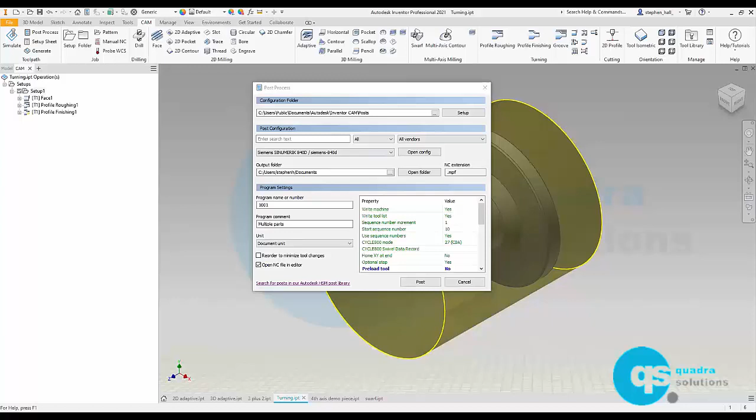Steve, just a quick one, chat. Yes. We're still seeing Inventor, mate. Aha, thank you. New share. There we go. Spot on. Thank you, Mike. Just undo that.

So that link will take you to this website. It says Fusion 360. Ignore that. It works for Inventor CAM as well. They both share the same CAM library. So if you've got a machine in there that you're looking for, let's say we're looking for a Hurco, you can see that you've got posts available for your machine. Always worthwhile keeping an eye on these because there may be some updates. For example, you've got a little recent changes option there. Anything that's been reported back to them, they will then update accordingly.

That doesn't just apply to milling machines. If I go into the drop down, you can see that we've got milling, turning, so on and so forth. So if we go to turning, you'll see that we've got quite an extensive list, which is getting added to at quite a rapid rate. They've got lots and lots of different machine types getting added. As you can see, some of them quite recent, 30 days ago. So at some point, something's been reported and something's been updated.

Right, apologies for waffling on, Mike. Hey, you're all right, chap. Nobody's left. Put it that way. You've definitely had everybody's attention, pal. They've probably fallen asleep. I shall stop that share. Right, thanks for listening, folks. And any questions? Stay online, though, Steve. Yeah, absolutely. Well, I think everybody online will agree with me. I can tell that you're a trainer. That was really good. Well, you're definitely not a blooming timekeeper as well. Well, this is true. Could have said it's an hour and 45, shouldn't I?

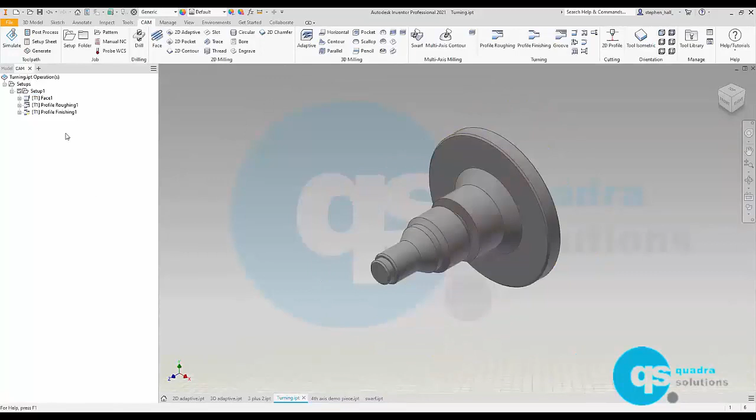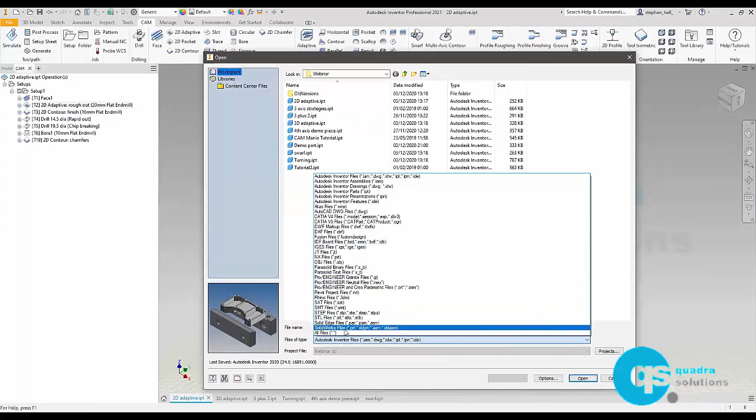It will default to Inventor files, as you would expect, but in the little drop-down there, you can see that we've got numerous parts. We can go for a standard STEP file, which is generic to most pieces of software, but you can also see that we've got files from other manufacturers such as CATIA. We've got Siemens NX files, Pro Engineer, so on and so forth. SolidWorks files as well. So quite an extensive list and a strong selling point in terms of receiving models from customers who may not use the same software.

Just appreciating time, Steve, just quickly. Somebody quite early on asked, will the simulation highlight any collisions? Yes, good question. Yes, it will. If I simulate that toolpath, you'll see at the bottom the green line, okay? As Shrek says, it's good to be green.

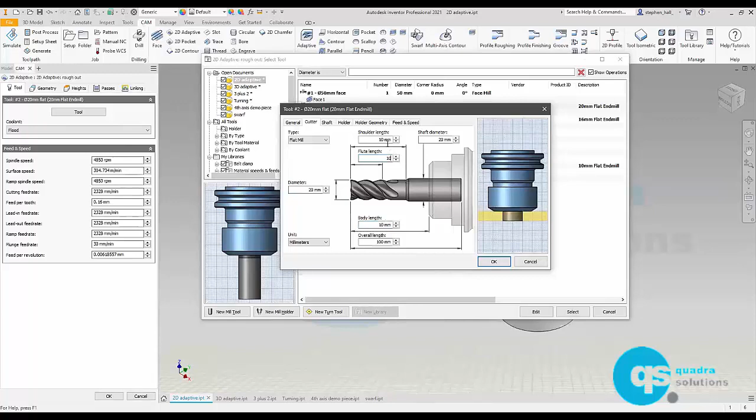If I quickly change, let me think, yeah, that'll work. If I quickly change that cutter to be ridiculously short, let's say it's going to be 10 millimeters sticking out. When I click OK for that one and select, okay, when I simulate that now, can you see those little red lines there? So they're your visual representation. That will tell you that you're going to get a bump or a bang. If you hover over it, it will tell you what the issue is going to be.

But I do appreciate that sometimes you might scan over that and you might miss it. You've also got an option there to stop on collision, so that as soon as you press play like so, you can see it's lit up red, it stops, it's going to make a bang, it's going to smash into the top of there. So you can then investigate what's gone wrong and sort it out.

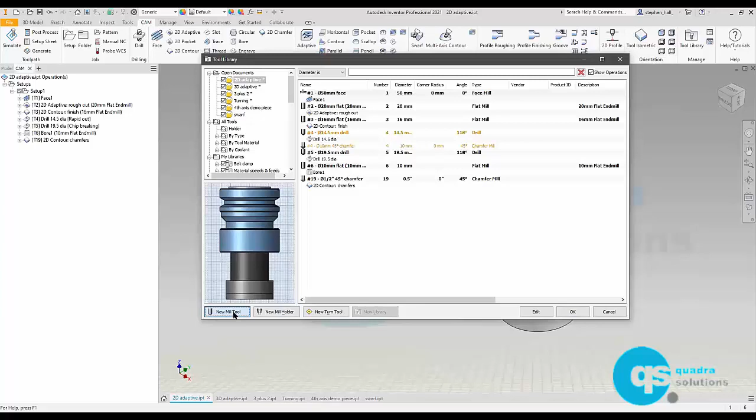Cool. Cheers for that. Our company often uses specialist tooling. How would this be replicated using CAM? Specialist tooling? Yeah. Right. Again, very simple. If I go to the tool library, that's probably the best way about doing it, and I've got an option there for a new mill tool. If I expand that, we've got different types of cutters there, so you can create your own tool. If it is a ball mill or so on and so forth, you can put all that information in.

If you've got something that's a little bit out of the ordinary, you've got an option down there, form mill. If I select form mill, then what you can do is import file. All you need to do is go into the Inventor modeling environment and just model up your cutter. So let's say you've got some weird and wonderful shape on there, be some rads or angles or whatever. Just draw that up yourself, sketch and revolve. You don't need to worry about the holder, just the actual cutter itself, and then you just import file on that button there, and that will give you your own specific tooling.

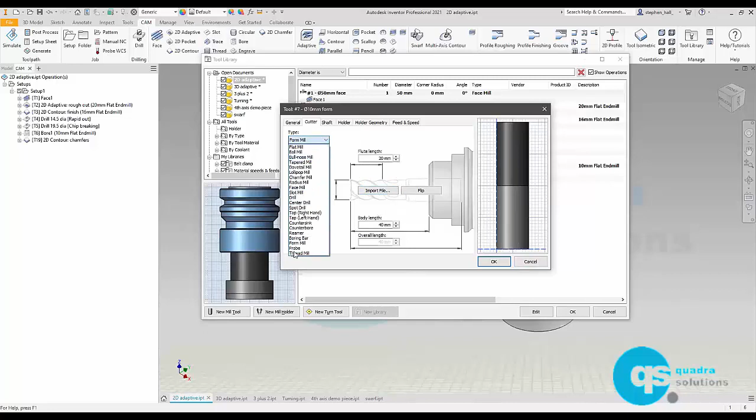Yeah, very, very simple again. But again, one that people aren't aware of. They just assume that everything's just straight out of the box, but as we all know, machining isn't like that.

There you go. Cool. Looks like somebody's been stalking you, mate, prior to this.

I've seen your blog demonstrating templates. The templates blog. Yeah. Right. Again, something handy that doesn't really jump out until you're aware of it. What you get more often than not is a lot of components that will use the same strategies. So, for example, you might use face mill and 2D adaptive and contour on different components of various shapes and sizes. And it can be a bit of a long-winded process, having to go through the process over and over again

for different components. Once you've created those strategies, if you select the top one and the bottom one, you can right-click and store them as a template. You've got an option there. When you store it as a template, you then give it a name, so on and so forth. Then if I just delete all those, what you can then do is create initial setup on your new component, right-click there, and you've got an option there, create from template. And all of those previously saved templates will appear.

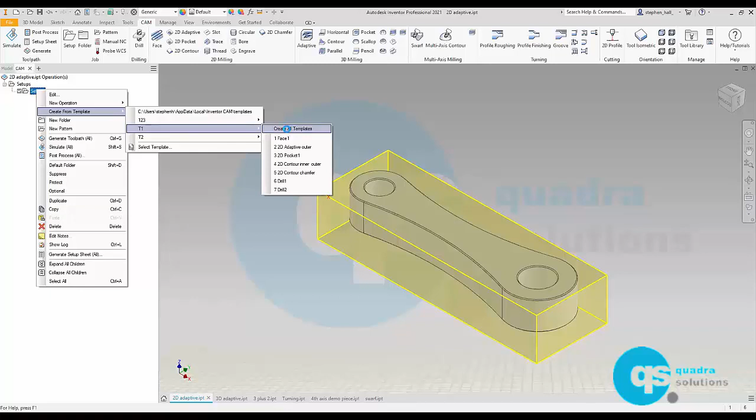Okay, so as you can see there, one that I did on a demonstration a while ago was a face with 2D adaptive pocket. So that's very similar, so that might be something we might need. You can do it so it creates all templates, or you can just pick specific ones. But if I just create all templates there, you see that now it's created lots of different templates that I need. You can see the little red X just tells me that some information is missing. I just then double click, click a new tool, the geometry I'm happy with, click OK, and presto, done.

It makes life a lot easier. Yeah, it's a nice little feature, is that one. It takes a lot of the pain out of it, really, I suppose, doesn't it? Absolutely. Yeah, it really does. Make this in and just tweak it to suit.

Yeah. That's class. Question. Oh, right. So you're the trainer. You know what you're doing.

It's a quick-fire question here. How long is training? The training course we offer is 2 days. That covers basic 2D machining, 3D machining, and turning. I do appreciate that some companies might look at different strategies and so on, so we could create bespoke training to suit their needs, but more often than not, the 2-day course does get people off the ground and get them up and running. And what do we do specifically with Allspeed?

Can you remember? What we tend to find with Allspeed is they have the 2-day course, but they sent the guys, actually the machine operators, on the course, as well as the guys in the programming office, so that the lads on the machine had an understanding of what was going on, that they weren't in fear, because we get that with a lot of machinists where they think the skills being taken away from them. So what Rory actually did is he sent all the lads on the machines on the actual course, and they've all got a workstation or a laptop alongside the machine, and they're actually writing their own programs whilst the machine is running, because they're enjoying the tinkering side of things.

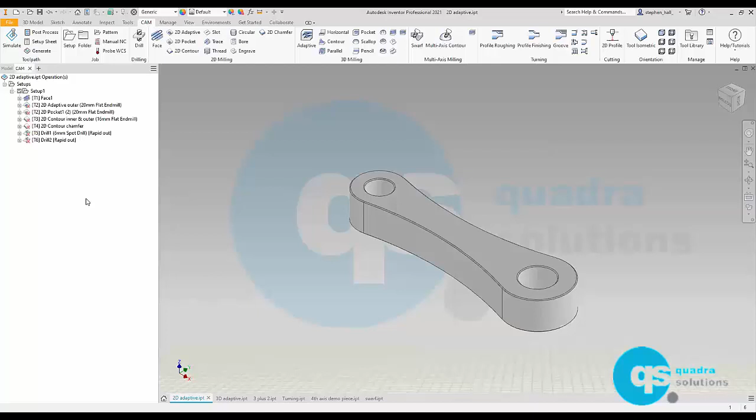This is the end. I'm really grateful to Steve for coming on and supporting us with this, particularly doing the live screen share stuff. It was really, really valuable, mate. We've covered off Inventor, we've covered off the AnyCAD technology, which means you could bring non-native stuff that isn't made by Autodesk. It could be SolidWorks, Creo, Pro-E, whatever. Bring it into Inventor, and then you can use that to feed off to actually do your strategies, develop your posts, and then change it as the model part changes, even from different CAD platform providers.